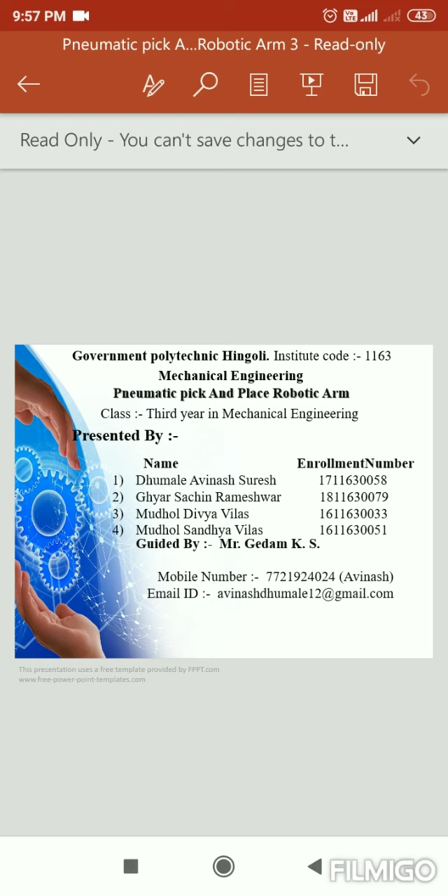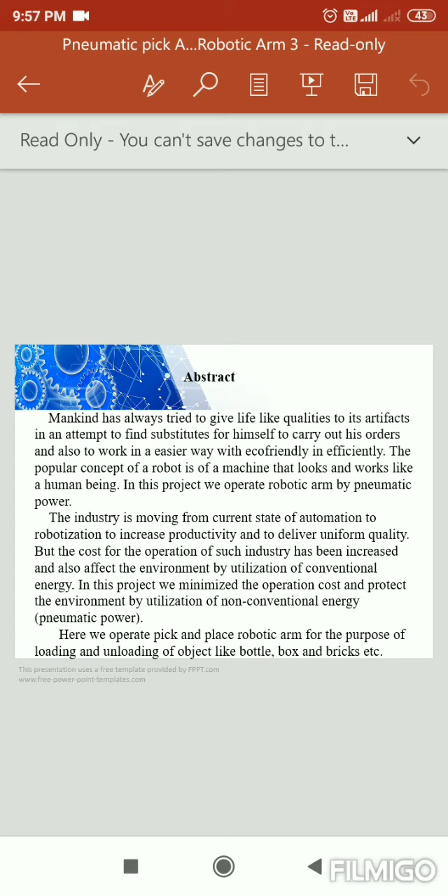This is the abstract of the project. In this project, we operated a robotic arm by pneumatic power. The industry is moving from its current status of automation and robotization to increase productivity and delivery quality, but the cost of operation has increased and also affects the environment through utilization of conventional energy. In this project, we minimize operation cost and protect the environment by utilizing non-conventional energy.

This is the overall index of the project, including all information in the contents. First is the introduction, second is the scope, third is the methodology, fourth is the construction and working, fifth is the list of materials used, sixth is the applications, seventh is the advantages, eighth is the project making, and ninth is the structure of the project.

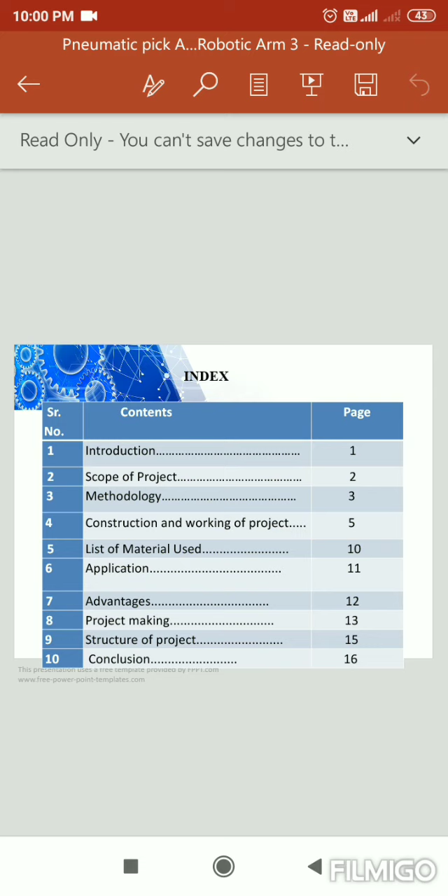This is the overall introduction to the pneumatic pick and place robotic arm. Automation is playing an important role in saving human effort in regular and frequently carried out work. One of the major and most commonly performed tasks is picking and placing of a job from source to destination. The pick and place robotic arm picks the object from the source location and places it at the desired location.

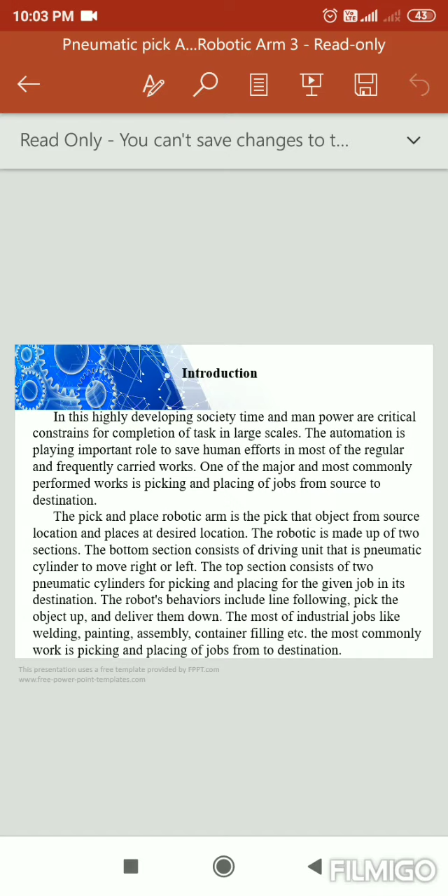The robot is made up of two sections, the bottom section and the top section. Most industry jobs like welding, painting, assembling, container filling, etc., the most commonly performed work is picking and placing of the job from source to destination.

Next is the scope of the project. It is very useful for the future. Large scale production and implementation in industry can be done, and the overall productivity of Indian industry and consequently the entire economy can be improved with proper design and fabrication.

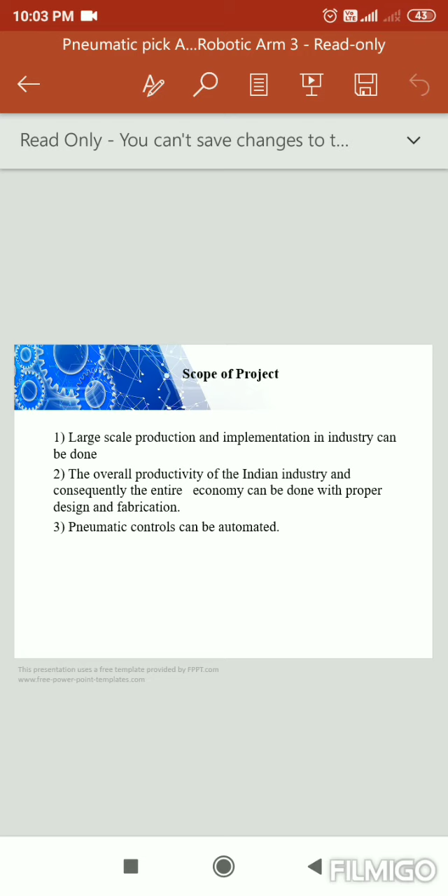Next is the methodology of this project. A gripper will be created and attached to the robot as a method to move things from one place to another according to given input. The design and development of the pick and place robotic arm consists of four main parts.

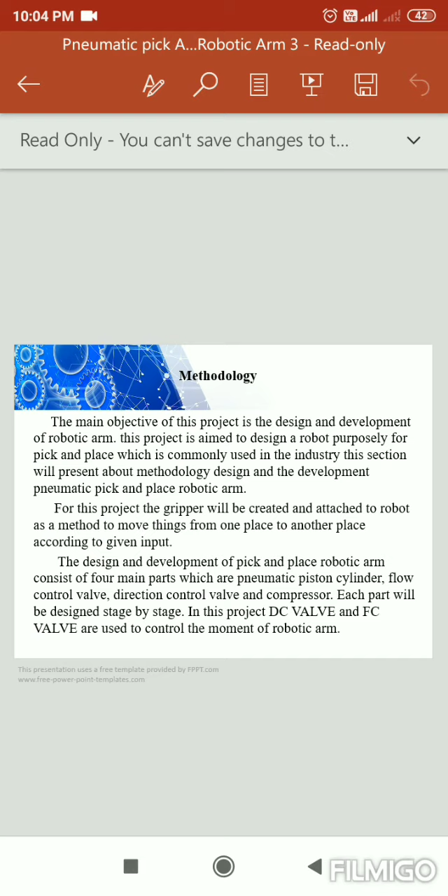The four main parts are the pneumatic piston cylinder, flow control valve, direction control valve, and compressor. The compressor is the heart of the project, and each part will be designed stage by stage. In this project, the direction control valve and flow control valve (FC valve) are used to control the movement of the robotic arm. While constructing the robotic arm, we used wooden boards or metal scrap to build its fundamental structure.

Various pneumatic cylinders are arranged in order to achieve specific movements. The gripper will also follow the given instructions. All the elements are combined together to develop the robotic arm, and all these parts are developed and analyzed to get better results.

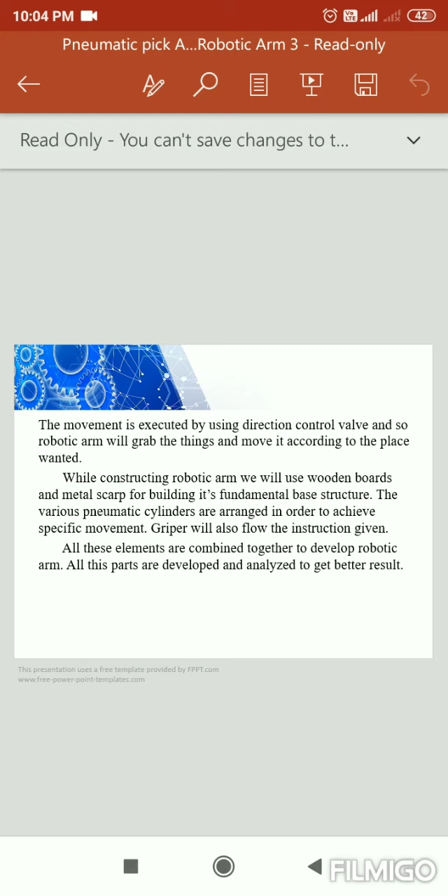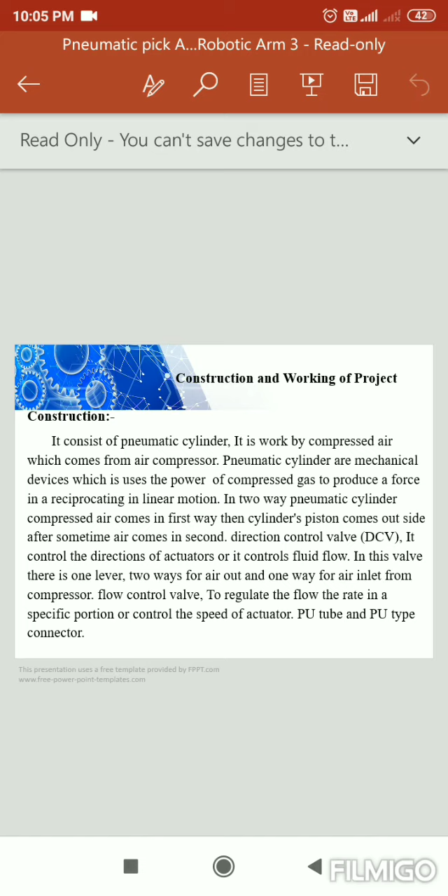Next is the flow control valve, used to regulate the flow rate in a specific portion, or control the speed of the actuator. Next is the PU tube and PU type connector. This is the overall construction and working of the project.

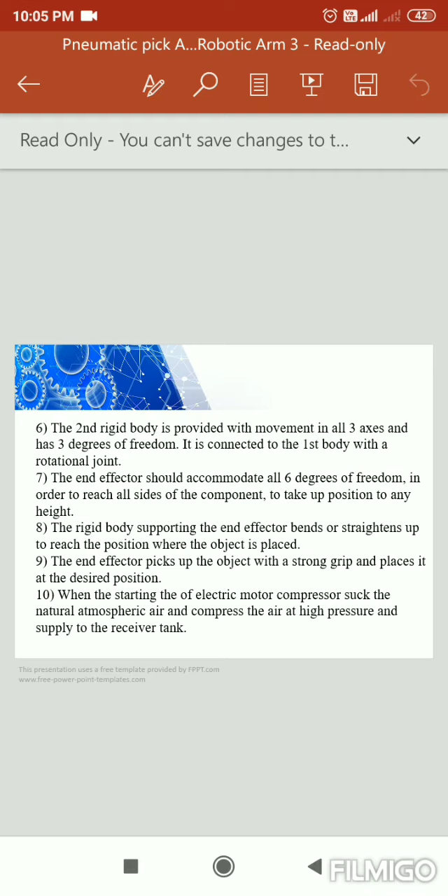When the compressed air passes through the reservoir, the reservoir passes high pressure air to the direction control valve through the PU tube. From the direction control valve, compressed air passes through the flow control valve, which controls the speed of the actuator. Then it goes to the actuators, which perform the task. This is the overall working of the pneumatic pick and place robotic arm.

Next is the list of materials used in this project, given in the slide. First is the pneumatic double acting cylinder, quantity 2, size 20 into 150 mm stroke. Next is the pneumatic double acting cylinder, size 20 into 100 mm stroke, quantity 1. Hand lever valve 5/2, quantity 3. PU tube 4 into 6 mm, quantity 8. PU tube 8 meter, size 4 into 6 mm.

Fifth is the push type flow control valve, quantity 6. Also push type PU tube, push type flow control valve, push type connector 9, and push type tee 6 mm, quantity 2.

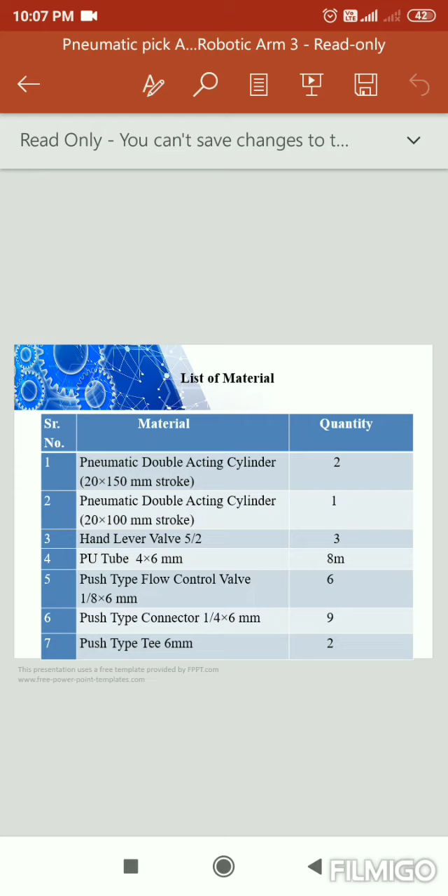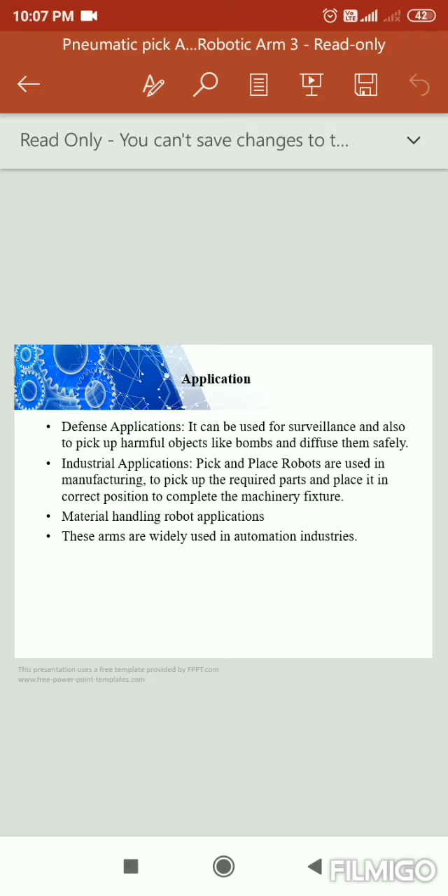The applications of this project include defense applications, industrial applications, material handling, and robot applications. These are widely used in automation industries. For defense applications, it can be used to defuse bombs safely, making it very useful in the defense sector. And for industrial applications...

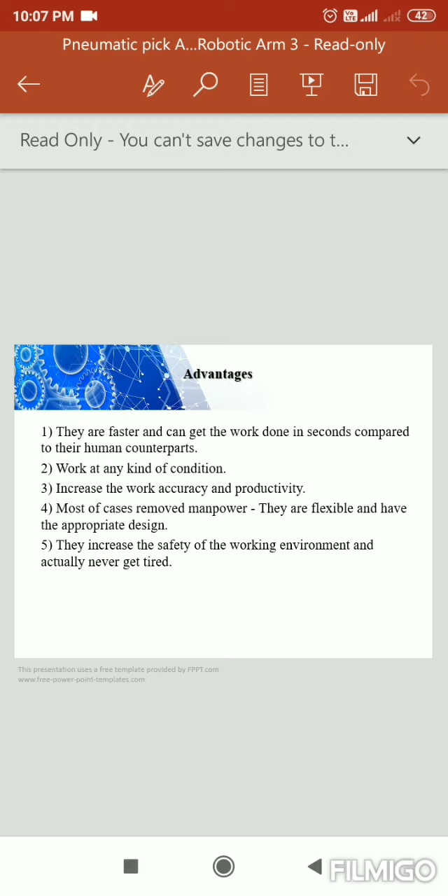Next is the advantages of this project. They are faster and can get the work done in seconds compared to a human. They work in any kind of conditions, increase work accuracy and productivity, and in most cases remove the need for manpower. They increase the safety of the working environment, and actually never get tired.

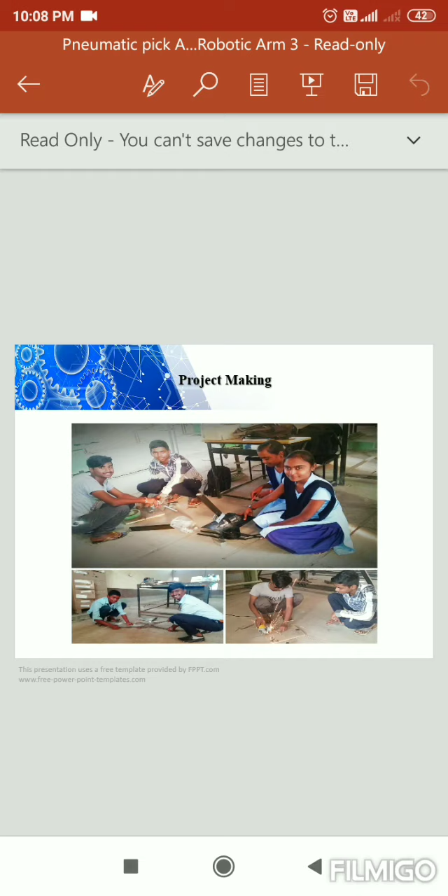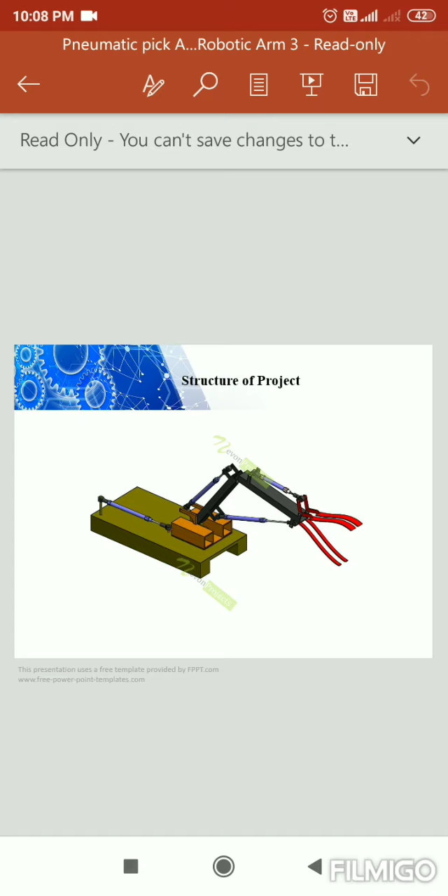These are project making related images, showing images from the workshop. This is the structure of the project. Before making the project, we built up the structure, then built up the project.

Conclusion: after completing the pick and place robotic arm project by pneumatic control, we know that our project can pick objects like bottles, bricks and boxes with weight not greater than 4 kg. Working on this project, right from the point of selection to testing, we had real fun and a great experience. The experience provided a lot of insight into various pneumatic systems and the selection of appropriate materials from different components.

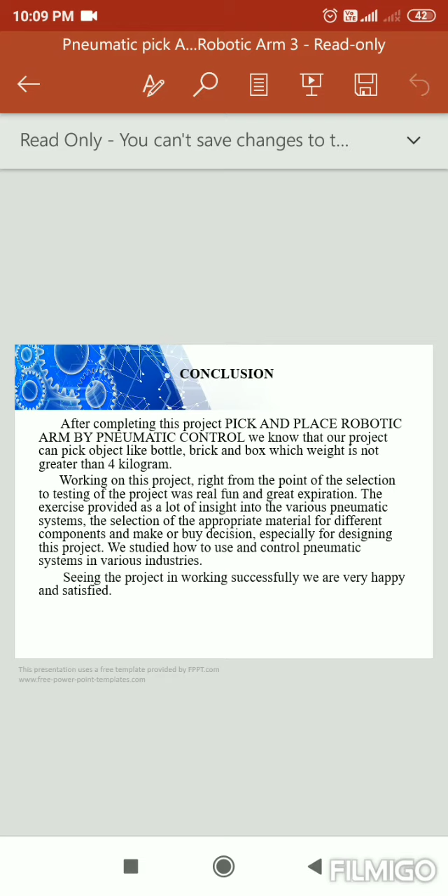It helped us in designing this project efficiently. We studied how to use and control pneumatic systems in various industries. Seeing the project working successfully, we are happy and satisfied.